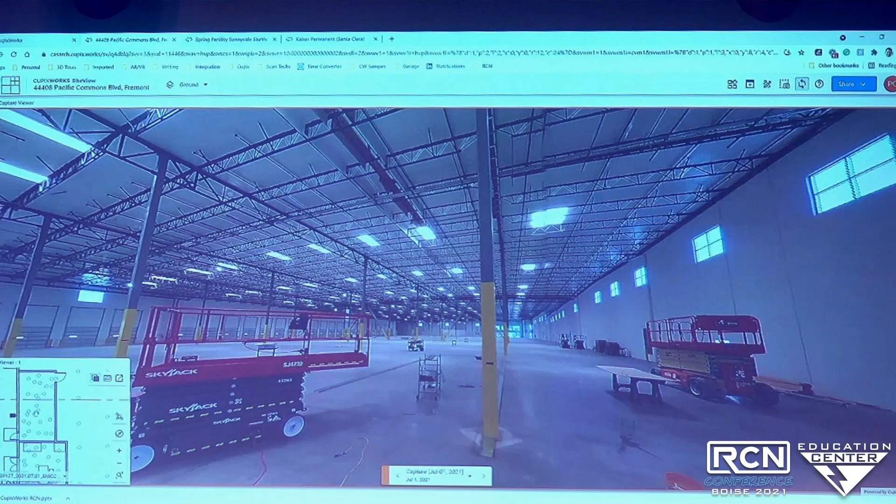Take a 360 camera, put it on a helmet or a selfie stick, and you literally just walk the site. Then our software is able to take that data, triangulate the path, and make it truly 3D.

Let's take this base technology that we've created and make it so it can work on millions and millions of square feet. What you're seeing now is the AEC industry trying to implement this whole idea of a digital twin.

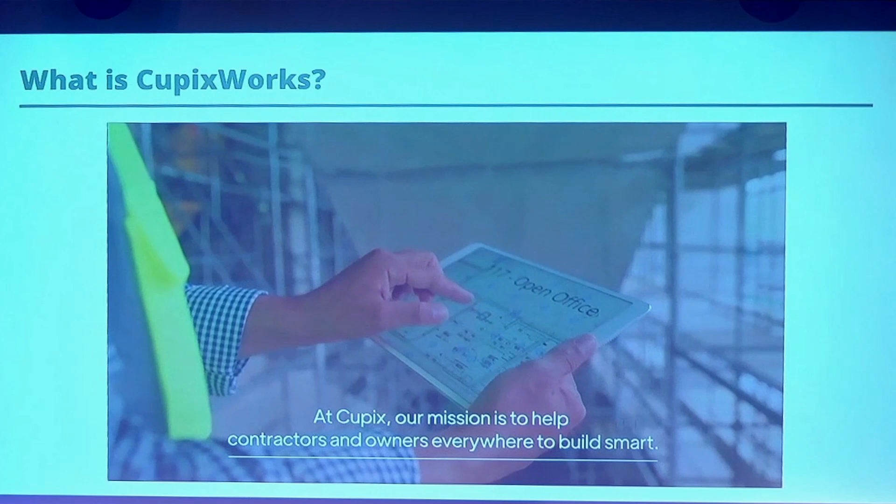I wanted to start with what is Cupix, and more specifically, CupixWorks. The root of our technology is being able to take consumer-grade 360 cameras, take panoramic images or panoramic video, and our software figures out and triangulates how they all relate to each other in physical space. Then we can take that data and align it to real-life objects, be it a plan or BIM, and constrain it to data that exists in real life.

We're able to get, I say dimensionally accurate, but for this crowd that term isn't quite right. It's not accurate like a laser scanner, not accurate like a mobile LiDAR. You're not going to use it for as-built, mission-critical information, but we're able to get what I call good enough dimensions from that data.

This is the only marketing video you're going to see here, but we'll get into more details about it, and what we're doing as a company, really building out a platform for the built world lifecycle.

Cupix was actually started in 2015. Now, I didn't start the company, I'm on the coattails of others here, working with really smart people. Simon came out of it, it was 2015. He sold a few companies, pretty smart guy, and he wanted to remodel his backyard.

He was so frustrated that he couldn't get people out to even give him a bid, and they were even charging him just to come out for a bid. Being the type of person he is, an expert and pioneer in 3D and 3D scanning technology, he said, this is crazy, I can solve this problem. When he started out, his original goal was to really compete with the likes of Matterport, but with just a 360 camera. That was the beginning of Cupix.

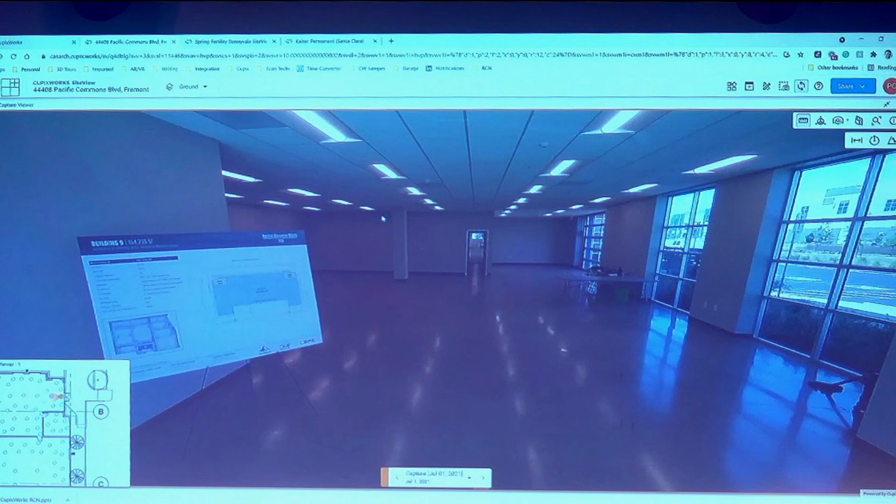But to give you an idea, I'm bringing up a live example here, hopefully it doesn't crash on me. One of the things is, I talk about these different capture methods, but you're not limited to just one. You're not locked into just video on a project or just cluster shot. It's all mix and match.

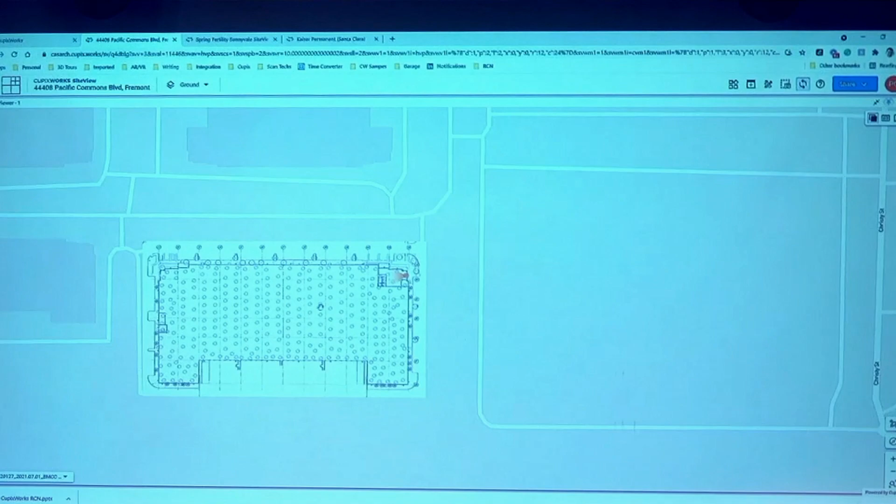So in this example, this is a warm shell, and they're using Cupix to help with pre-construction and pre-design planning. If I enlarge this, it's a fairly large, empty warehouse currently. As you zoom in, the whole warehouse was captured with video, but in the lobby area they used cluster shot because they wanted more detail and better information there. So in the lobby, if they wanted to get a measurement, they could do that.

So I'm going to take a 3D measurement here using what's called stereo matching. Again, this is just images—there's no point cloud, no mesh in the background, but we can still get measurements. If I click a point there... sorry, hit the wrong button. So I can stereo match that point in space, and I want to know the distance to the floor, and we're going to tell you what the offset is.

Again, all of this is from imagery. You're not going to use this for prefabrication of items, but what we're seeing now is, in some cases where you don't have any information, there's a hybrid approach: you take your terrestrial or mobile LiDAR data, do sparse data capture, then capture everything else with Cupix, and we can align our data to that terrestrial LiDAR data. What you get is super valuable—your walls, doors, ceilings, lights, sprinklers, all of that, you just get from Cupix. So we have some people doing a hybrid type approach with that LiDAR data.

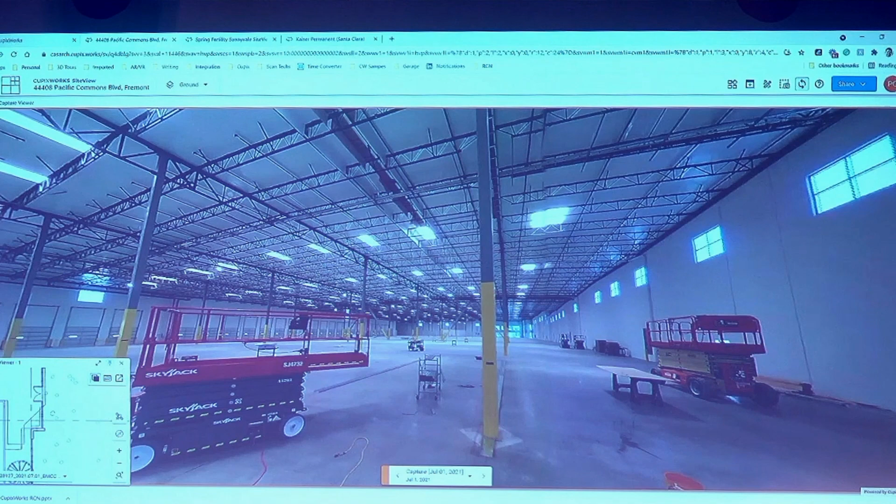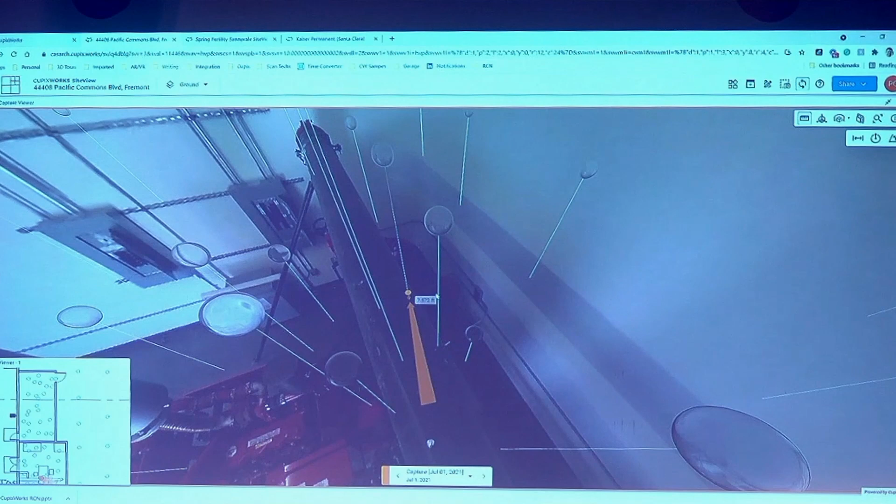But then in some areas—this might not be the best example, but it's kind of a small area—you want more detail in rooms like this. So what I'm going to do is enable panobubble mode, similar to your terrestrial LiDAR, and say I want to go up there and look over. So you can get views like this with Cupix and cluster shot, and I'll show you some other examples of that.

Moving on, every capture—be it a Cupix capture or a point cloud—geospatially, we know how they all relate. What you're seeing here are all Cupix captures, but you can see how they're all synchronized. If I zoom in on that reference plan, it's a fairly bad reference plan—looks like it was originally a bitmap that was scanned in. Notice how everything's color-coded: green, cyan, magenta, and orange. When I say cyan and magenta, you can tell I probably used AutoCAD in the past—those are AutoCAD colors. The orange, I don't think, was one of the standard eight colors in AutoCAD back in the day.

Notice how we don't require you to capture in the exact same spot, but we geospatially know where they should be. So when you start navigating through that space—this is where it gets interesting—we just know where you are, and we'll load up the closest panoramic on all those data frames. Part of what we did with the platform is, it's hard to notice, but we made this all modular now. Not that everything's implemented yet, but everything's plug and play on the back end.

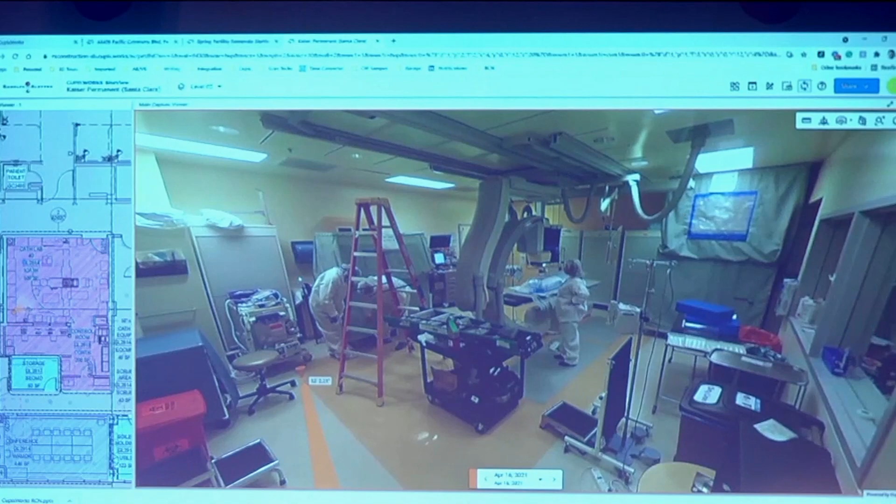Going on to some other examples, kind of a pet project I had with some contractors locally in Silicon Valley. I always like trying to get into environments where, you know, what can Cupix do that would be very hard for anybody else to do?

This is an example of a cath lab at Kaiser, and it's an active cath lab, so they're only able to get in here on weekends or at night. This area is fine, but really the problem is what is above there, above that hard ceiling? There are only 4 access points to get in there. You can see one of these access points. They have to put up a containment for contaminants and particles, and you can only open 1 access point at a time, so it's very challenging. Even if you had a terrestrial laser scanner, you could maybe get up there once, and that's about it.

So we took this as a challenge as to what we can do. I'm only showing you the ground level here, and this is above the ceiling. Granted, some lights had to be staged, but you're able to walk and visibly see every square inch of this above-ceiling area with Cupix. Again, these images are not manually placed.

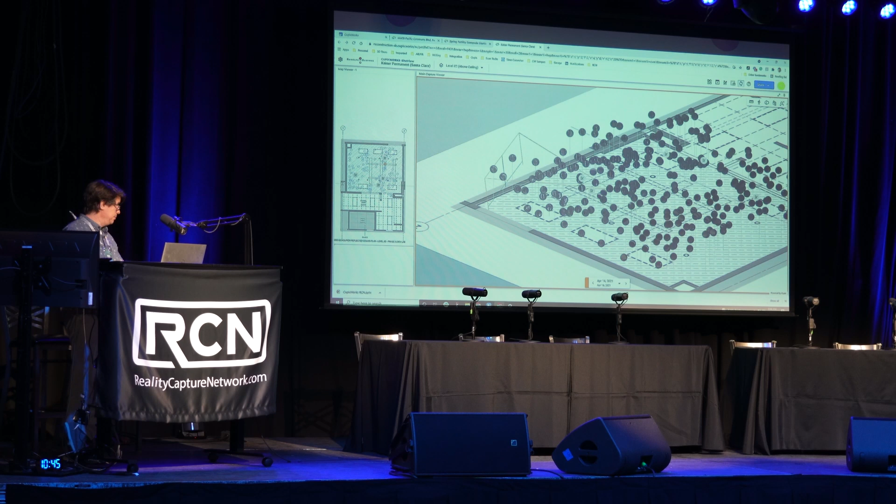Granted, this was a pretty complicated capture just to get those images, because you can only be at 1 access panel. So it's a matter of taking a super long boom pole, bringing it back, and so on to get it in there. In the software, with this data set, there was 1 panoramic image our software didn't know what to do with, so you just hide it. Doesn't matter, what's 1 out of that many? And with that, you can still get basic measurements too.

It's scaled to real life information. We have a whole constraints engine built into the system. I think in this example it was probably scaled to the reference plan, but we can scale to a dimension, to a reference plan, to a point cloud, or a BIM object. We can scale our data to that, because when you take this imagery, images don't have scale associated to them. So what we do is scale it to a real life dimension to be able to do that.

So the next thing I want to talk about, and again, I think I'm okay on time. I'm not sure, I'm still on West Coast time here.

But what I wanted to talk about next was what we're doing, kind of new things that we're doing now. I've talked about digital twins, and recently made some major infrastructure changes to take advantage of data coming into the system. Really when it comes to digital twins, like manufacturing a jet airplane, you have sensors on them constantly giving data as to what's going on, and you're able to predict and do analytics on this data.